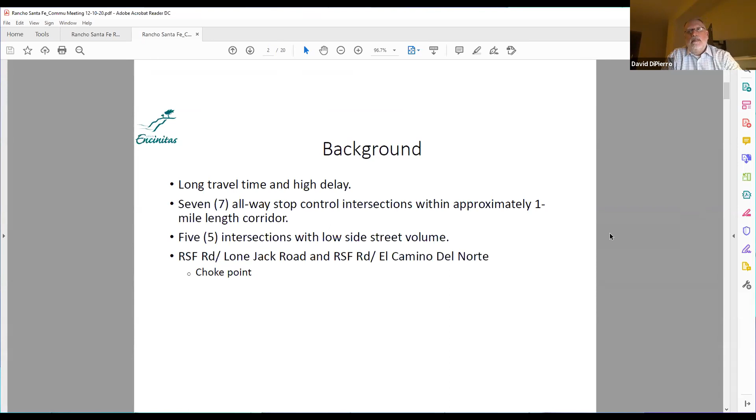So what the team's focus has been while working on this project is how can we reduce travel time and delay, and at the same time keep speeds in check, continuing to provide safe roads for all types of road users, whether you're driving in a vehicle, riding a bike, or walking as a pedestrian.

Again, the facts are that the heavy congestion and queuing of the traffic you'll see is southbound in the morning peak hour, and just the opposite you experience in the northbound direction during the evening peak hour.

These photos were taken in February of this year before we had lockdown, and you can see from pretty much every all-way stop that we took these photos. The first one is at Olive Crest, the next is Lone Jack, and the third is El Camino del Norte. Again, this is your evening peak hour. We see quite a bit of congestion and long delays.

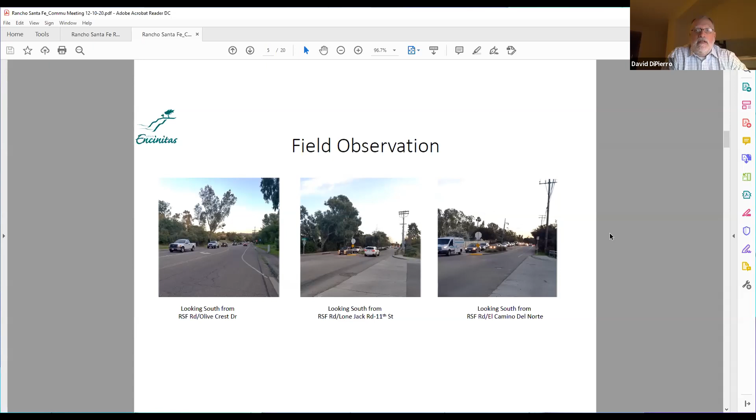Moving further to the south, from 9th Street to Whispering Winds, and then 7th Street. When you get to 7th Street, you can actually see traffic's moving pretty good going in the northbound direction in the evening. But as you continue further north, that's when you see more congestion at the all-way stops.

What this slide shows is we went out and did turning movement counts in the morning peak hour and the afternoon peak hour. I won't spend too much time on this, but for the 7 all-way stop locations, you'll see it's got low side street volumes during both peak hours, except for the 2 intersections which are the choke points we found as we were studying this segment—that's at Lone Jack and at El Camino del Norte.

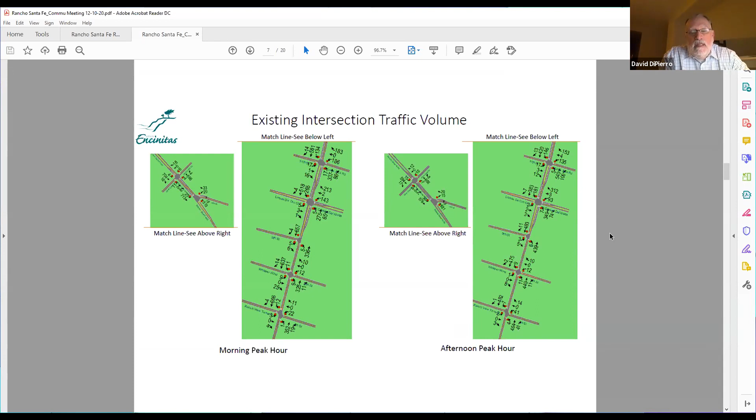This slide shows basically what the ADT is on Rancho Santa Fe Road. South of El Camino del Norte it's around 12,500, and as you move north of El Camino del Norte, it gets to 15,000 plus ADT. So El Camino del Norte seems to be the location where you see a rise in ADT along this segment.

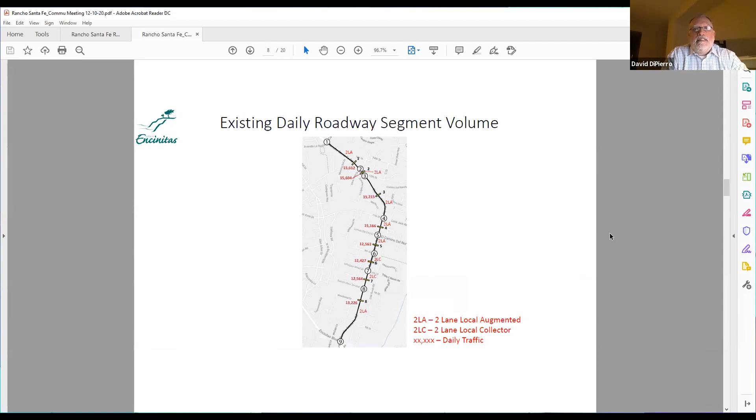So as we went through and studied the alternatives, on the left side you see what the existing road intersection controls are—that's basically a signal at your bookends at Avenida La Posta and down at Encinitas Boulevard, and your 7 all-way stop signs in between. The alternative being recommended is to install roundabouts at Lone Jack and at Camino del Norte and keep the all-way stops at the other 5 intersections.

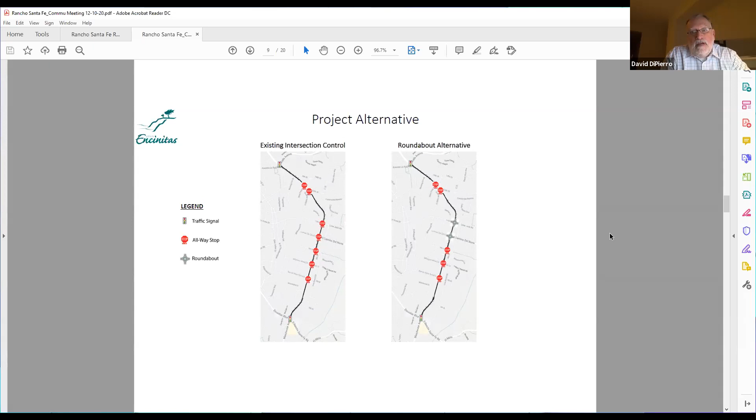This slide shows what the roundabout concepts can look like. On the left side you have Rancho Santa Fe Road at Lone Jack, with a 100-foot diameter circle. The design would have a central island of about 40 feet, a truck apron of 10 feet, and travel lanes of about 20 feet going around. That's also the case for the roundabout on the right side at El Camino del Norte. It looks like it can fit within the existing right of way, but it would have to move on to engineering design to see for sure.

Advantages of roundabouts: they are traffic calming measures and drastically reduce traffic accidents. With any 4-way intersection you usually have 32 conflict points; with roundabouts you have 8. They're safe for pedestrians to cross since you're only crossing half the road at a time. They also allow traffic to go back the way they came for a U-turn. They don't require power like a traffic signal would, so with the fires we've been having and the rolling blackouts, it wouldn't affect a traffic control device like this. And it keeps within the rural characteristics of the community.

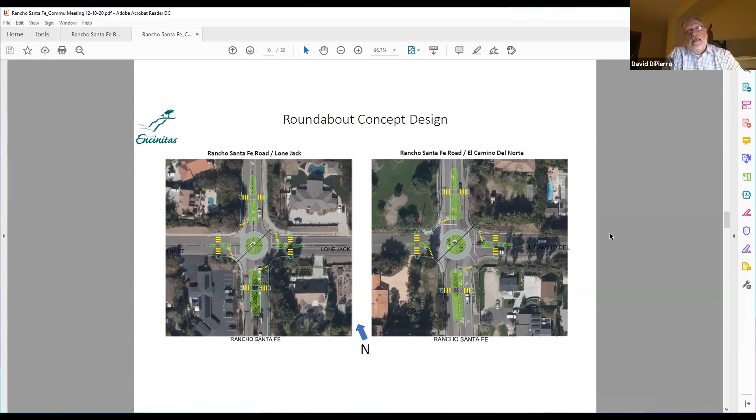So again, you ask, with a 100-foot diameter roundabout, would it work? Well, you guys have already proved that it's worked in 2 locations on Leucadia Boulevard. This one at Hermes Avenue—I went on Google Maps and measured it out from curb to curb, and the diameter was about 90 feet.

On the right side, you can see how traffic moves around the roundabout quite easily. Again, the important thing about roundabouts is to provide deflection for traffic calming.

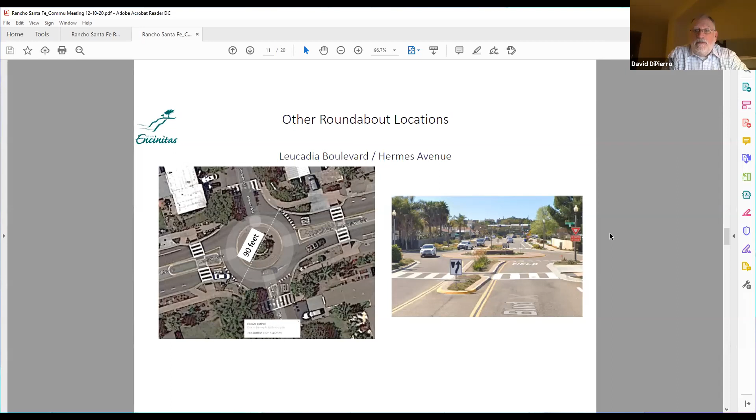The other location just to the east, I measured this roundabout to be 95 feet in diameter. What I'd like to show is from Street View, a box truck going around the roundabout. What I noticed is this box truck is actually making a U-turn and going back the other way towards I-5. I found that interesting, and it easily seemed to be able to maneuver around this roundabout.

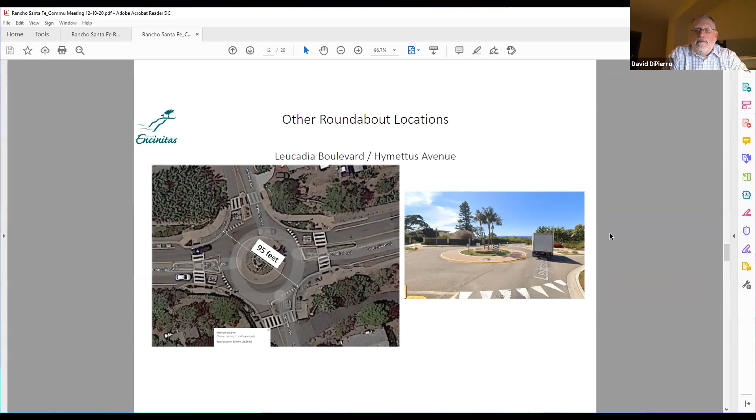With heavy traffic in the morning, it takes a little over 16 minutes to go from Avenida La Posta down to Encinitas Boulevard. You can see that the backup really starts at Lone Jack. The numbers in the southbound direction under existing conditions show a backup of almost 12 minutes going from Avenida La Posta down to Lone Jack.

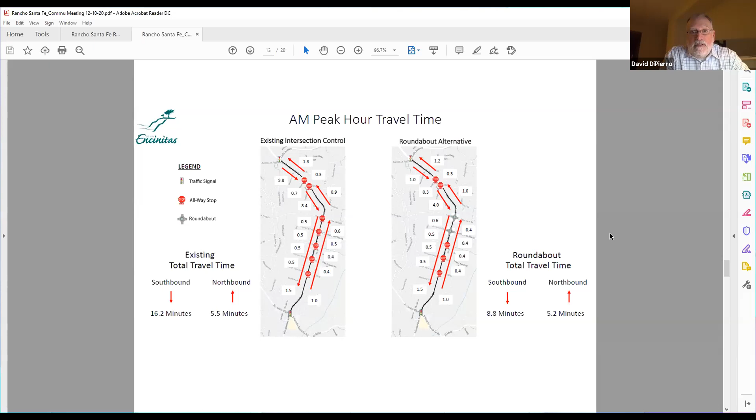If you look to the right side of this figure, it shows how installing roundabouts improves the travel time. It goes basically in the morning from 16 minutes down to about 9 minutes. You can see how we improve the travel time going south from Avenida La Posta down to Lone Jack — it's improved by about half.

Now the opposite, the PM peak hour travel. On the left side of the screen, existing conditions show it's almost 19 minutes to go from Encinitas Boulevard up to Avenida La Posta. By installing the 2 roundabouts being recommended, we've improved travel time from about 19 minutes down to 15.

What you see in this figure too is where the backup starts, around Lone Jack, and it backs up into Camino del Norte and further to the south. By flushing the traffic out with the roundabouts, we can improve traffic moving along Rancho Santa Fe. In fact, we've done such a good job moving traffic along Rancho Santa Fe that it now backs up at Avenida La Posta.

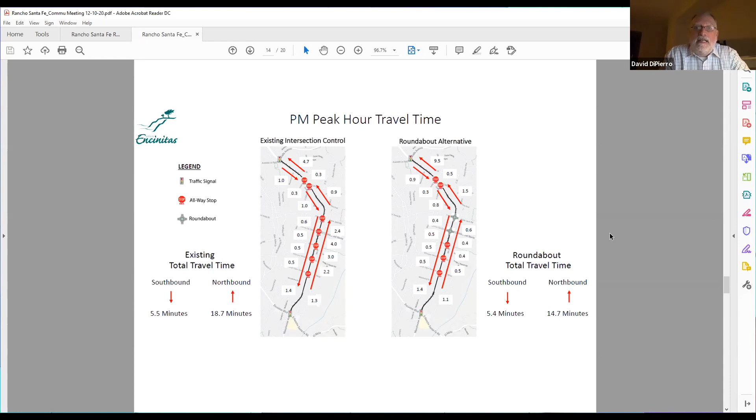We're showing almost a 10-minute backup at that intersection. I just want you to remember that because we're going to come back to it in another slide.

The intersection conditions at the 2 roundabout locations, Rancho Santa Fe Road and Lone Jack: under the existing all-way stop traffic control, it's actually unacceptable for both AM and PM at Rancho Santa Fe and Lone Jack. But by installing the roundabout, we bring it up to acceptable.

For Rancho Santa Fe at El Camino del Norte, it's actually an acceptable level of service today under the all-way stop, but by installing the roundabout, we improve it greatly. When I talk about unacceptable level of service, that's level of service E or F, and acceptable level of service is D or better.

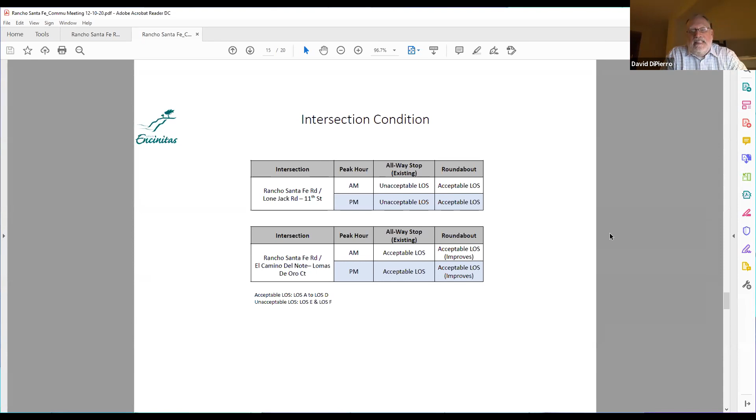As I mentioned, with the roundabout in the PM peak, we have almost a 10-minute delay coming up towards Avenida La Posta. One reason is the way it's currently designed: one northbound left turn lane and a through-right turn lane. It's actually operating at level of service E today.

We took a look at it, and with restriping measures, staying within the existing curb to curb, we feel you could restripe it to provide a left turn lane northbound, a through lane, and a through-right lane. By doing that, we can improve the level of service from E to D, which will also improve the delay and travel times going northbound.

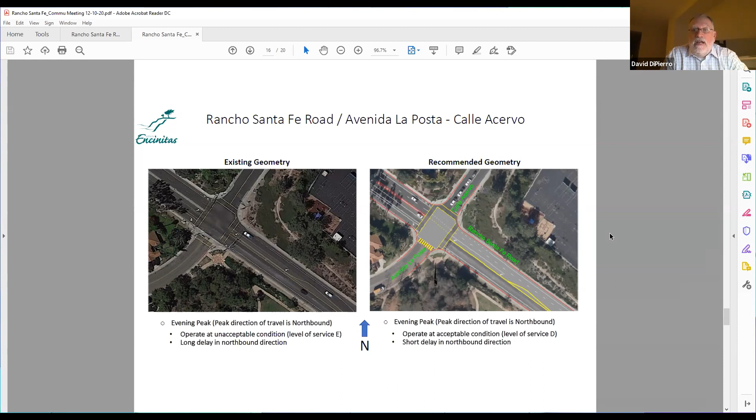On this slide, we're trying to improve safety for pedestrians and bicycles. By taking the travel lanes from 13 feet down to 10 feet along Rancho Santa Fe Road — and we're still looking at exactly where we might want to do this — by reducing the travel lanes, you can actually widen the shoulders in some areas up to 6 feet.

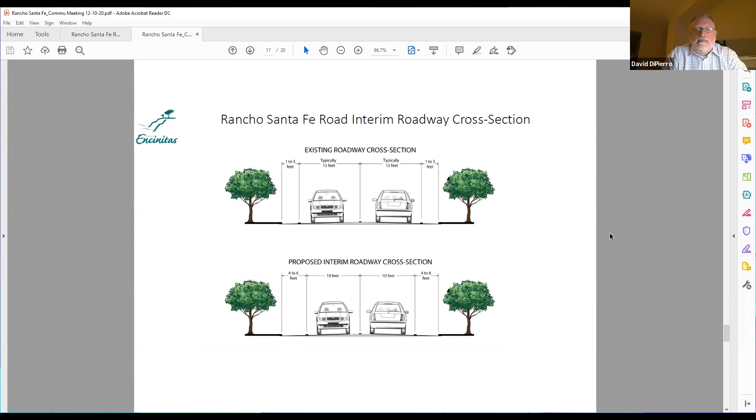Knowing that Trail 82 is coming in on the east side of Rancho Santa Fe Road from El Camino del Norte down to Encinitas Boulevard, you can actually shift the road over to the east and reduce the travel lanes down to 10 feet. So if you have your Trail 82 at 8 feet wide on the east side of the street, you could possibly widen the shoulder on the west side for pedestrians and bikes from 7 to 10 feet.

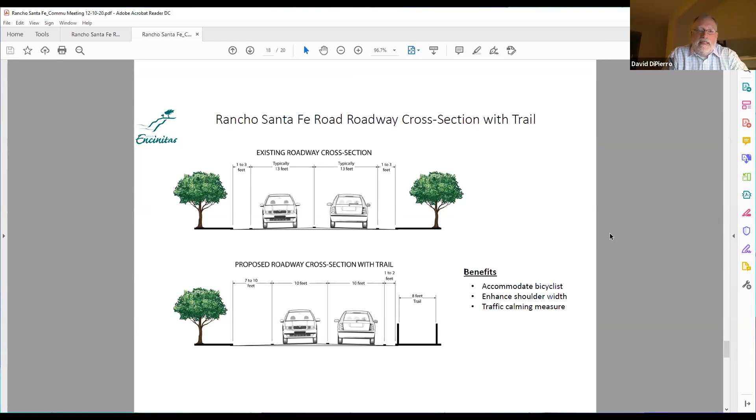Next slide, please. We also looked at the potential of installing a mid-block crossing, about halfway between Morning Sun and Olive Crest. For an uncontrolled mid-block crossing, you can install rectangular rapid flashing beacons or possibly in-pavement flashes. That section of road is actually wide enough where, with some design work, you might be able to put in a refuge island too, and something to look at.